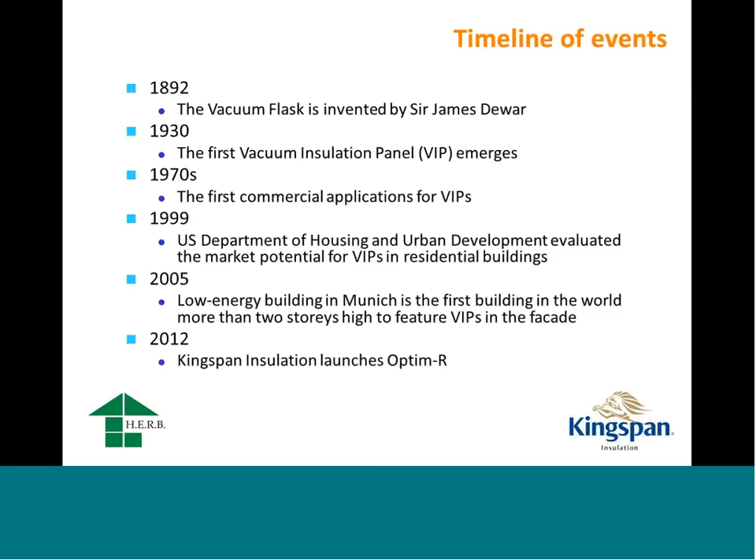Optim-R has a thermal conductivity of 7 milliwatts. This is aged, it's not the initial values. You might have seen on Safa's slides where he got some very low values of 0.003 up to 11. Some of those would be the initial value, but when you've aged it, our product gives you 7 milliwatts.

One of the problems with vacuum insulation compared to the other commonly available insulations is that it can't be cut on site. It needs to retain its vacuum. Without the vacuum, it's still very good, typically 20 milliwatts, but it needs to retain the vacuum in order to retain that 7 milliwatt thermal performance.

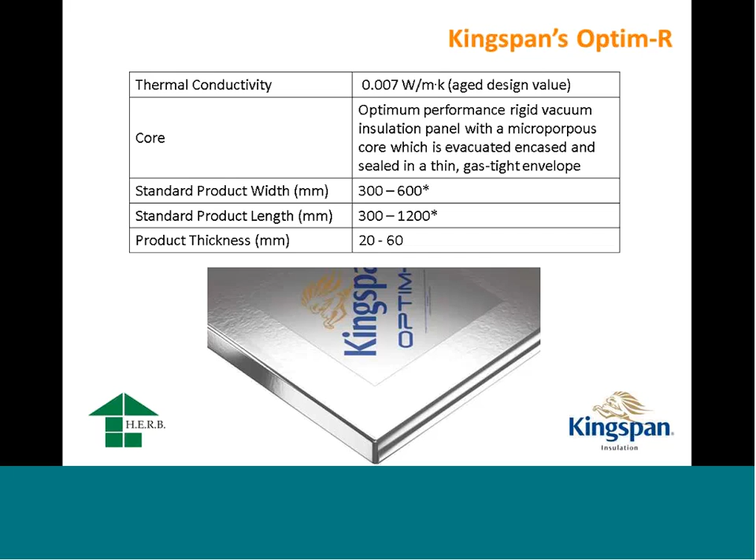And two of the ways we're using to combat that is, one, we're offering a wide range of sizes. We're going to be capable of making and supplying to the industry 300 by 300 up to 1200 by 600 millimeter size panels with a wide range of thicknesses, 20 millimeters up to 60 millimeters. And that will allow us then, through our design service, to optimize the coverage of Optim-R for any given elevation. So we get the details from our clients, drawings of the elevation of the particular application, and we can provide them a plan of which sizes to put where to optimize that coverage.

This slide again is similar to the one that Safa showed you, but I think brings it home a little bit when you start to look at it in comparison and compare the R value. This is an R value of 6, and you can see there in traditional materials such as mineral fiber, you would need 220 millimeters. With Optim-R, that can be reduced right down to 40 millimeters.

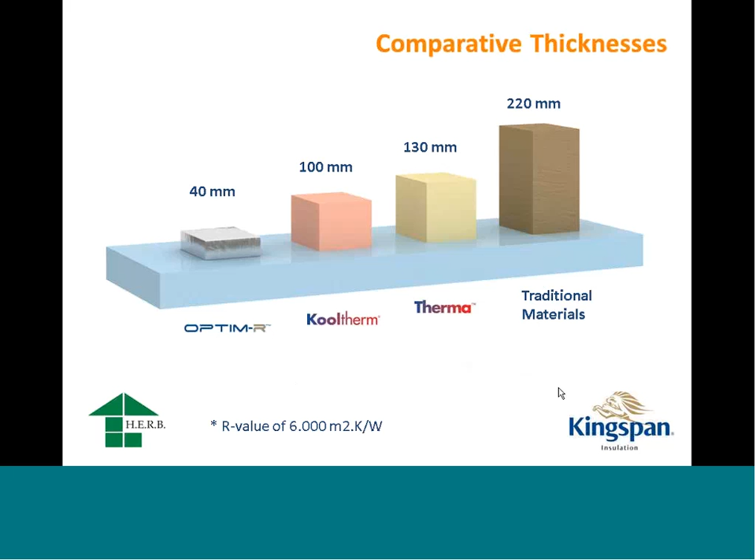And I think it's quite obvious there the advantages of this space saving, particularly in retrofit, where the fabric already exists and you want to protrude and extrude as little as possible from that fabric. We've now launched several applications and have full technical details of them.

One of them is flooring. Again, a lot of heat is lost through particularly solid concrete floors, and when you're doing a retrofit, that's one of the areas you can definitely look at to improve the thermal performance and reduce the energy required. So by using a VIP, you can minimize the amount of intrusion needed into the room. So this will save things like moving radiators or skirting boards or even door lintels if you go with other alternative insulations where the thicknesses could be quite high, or if you wanted to use those, you'd have to dig it out to stop you from having to replace the skirting boards and get the U value you require.

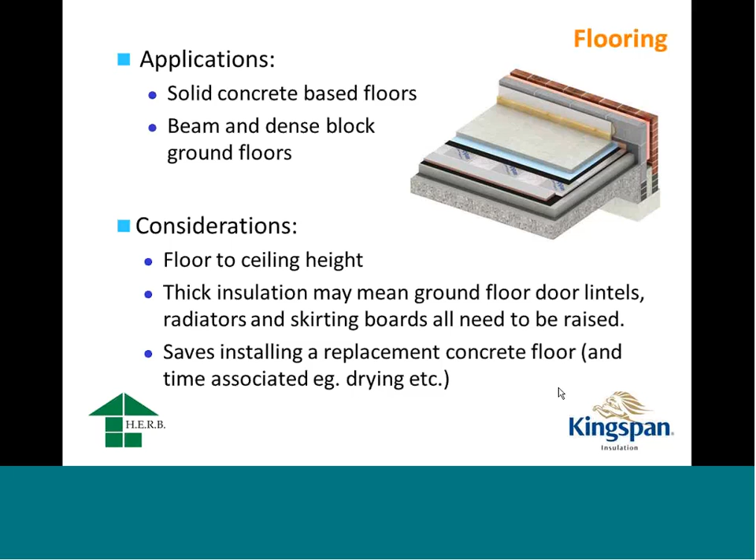And there's an example of the design layout that we're offering our customers. You can see there in the top left-hand corner the optimised design with the sizes that we offer in Optim-R. And then by way of comparison, we've looked at an Edwardian house, solid concrete floor, perimeter area ratio of around 0.3. To achieve a U value of 0.20 watts per meter square Kelvin, you'd need only a 20 millimeter thick Optim-R panel. The alternative would be to use, say, EPS, which is a commonly used flooring insulant. For that, you would need 95 millimeters. And you can see there that that's 75 millimeters of saving encroaching into the room.

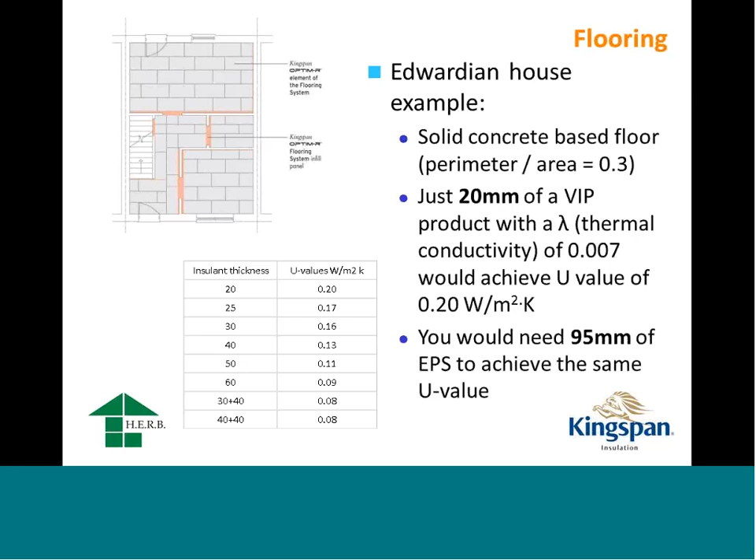Another application we've developed for retrofit is external wall insulation. Again, you saw that on Safa's presentation. It is a great way to improve the thermal efficiency of existing buildings with solid or cavity wall and solid block work. You can see on the image there, we bond the vacuum insulation panel to the outer fabric, and then we use infill panels, Optim-R flex panels, which surround the VIP and allow a mechanical fix through to the wall to allow the different finishes, brick slips, render, etc.

And when we calculate the thermal performance of that wall, we take those infill panels into consideration, and we do basically a weighted average reading to optimise the thermal performance from the VIP. Again, this stops potential remedial work. If you use conventional materials and you're looking for particularly low U values, then that might mean you're going to be protruding 100, 150 millimeters out, which means that your eaves might not cover it. And so then remedial work to the roof might be necessary.

There might be also space constraints down the sides of alleyways or gaps between terraced housing, for example, which is a particular problem we've seen on the Herb project, where we're looking at Victorian properties. And if you try and achieve some decent U values with anything other than vacuum insulation, you start to impede on the access down the sides. You can't get bins down, etc.

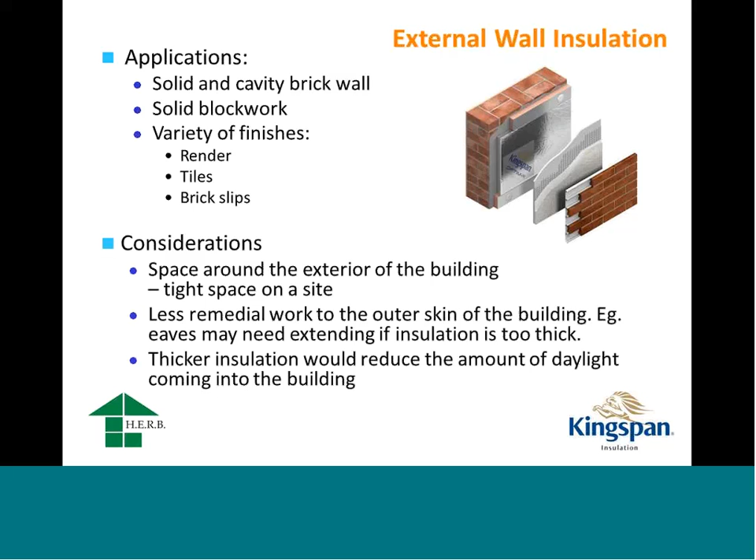Another application is roofing and terracing, where again similar considerations are taking part. We don't want to increase the current roof height too much because of parapets and other planning restrictions. You want to maintain a nice even transition between indoor and outdoor levels, particularly on terraces. Again, a thin solution is what is being called for there, and we offer a range of construction build-ups for green roofs, metal concrete roof with no ceiling, etc.

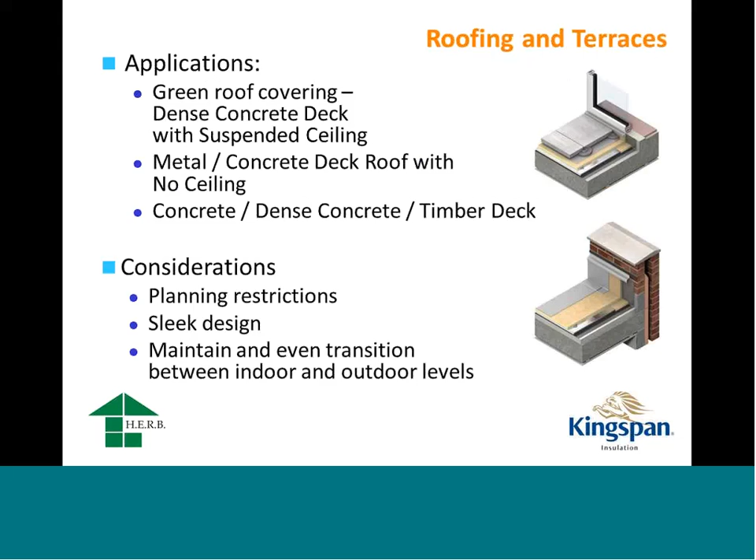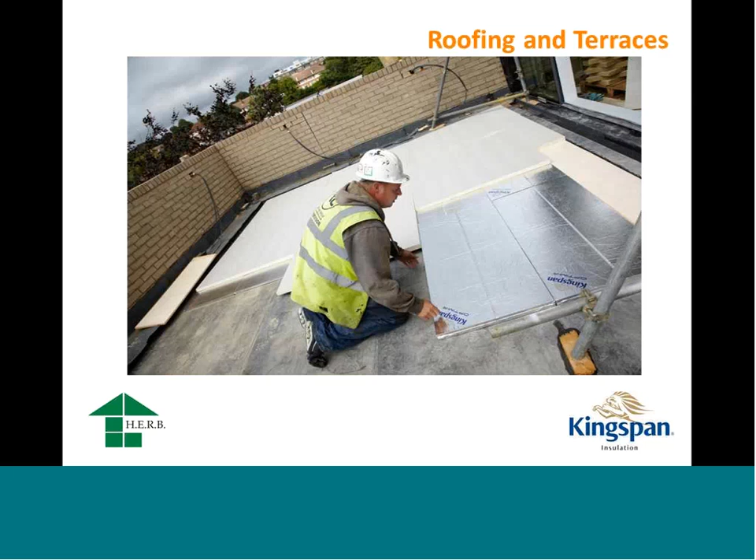And the next slide shows you the installation of vacuum insulation panels on a roof terrace. And you can see there what we've got. The bottom layer is a bituminous vapor control layer. It's about 5 millimeters thick. The VIP is placed right on top of that. It's bonded to it, and then on top of the VIP, in this case, we've got PIR. It's a tapered PIR, allowing for rainfall. But there are various options you can use to finish off the top of the product. And obviously, on top of that would be the water control layer.

So those are the ones we've currently developed. There are future applications we're working on, particularly rain screen and internal wall insulation, and this is a big part of the H.E.R.B. project. As I mentioned before, there are external wall restrictions. So we're looking with the Mark Group, who are also part of H.E.R.B., at a cost-effective, simple method of installing VIP as part of the internal wall insulation solution. And then going forward, we're also looking at inverted roofs, window reveals, timber frames, floating floors, anywhere where the U values are reducing and the restriction on space becomes critical.

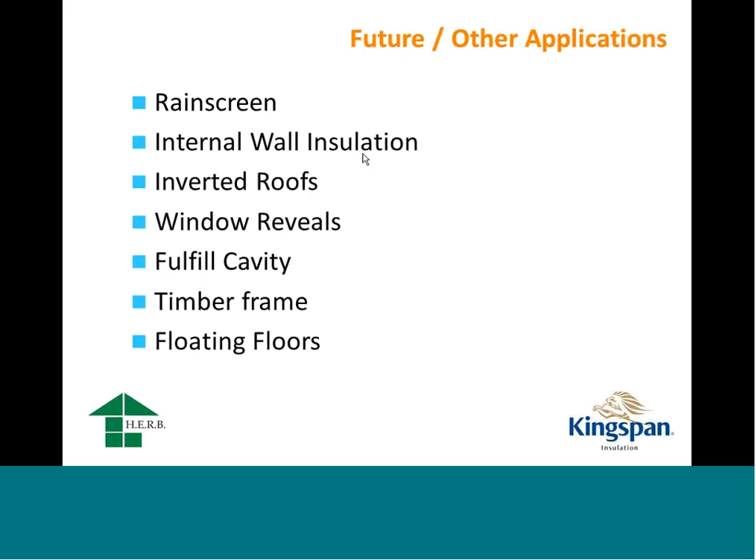So that really concludes the presentation. I'd just like to finish off by covering a few of the points. Optim-R has an insulation performance of around 5 times better than the other insulating materials that are out on the market. So this enables architects to come up with thinner solutions. It's a real problem solver where the architect doesn't want to compromise between thermal performance and space. The design service allows us to provide full optimization and design characteristics of a given elevation. And that means really that the low U values that are being called for by current legislation, and legislation we think is going to come in this year in 2016, can be achieved by using Optim-R.